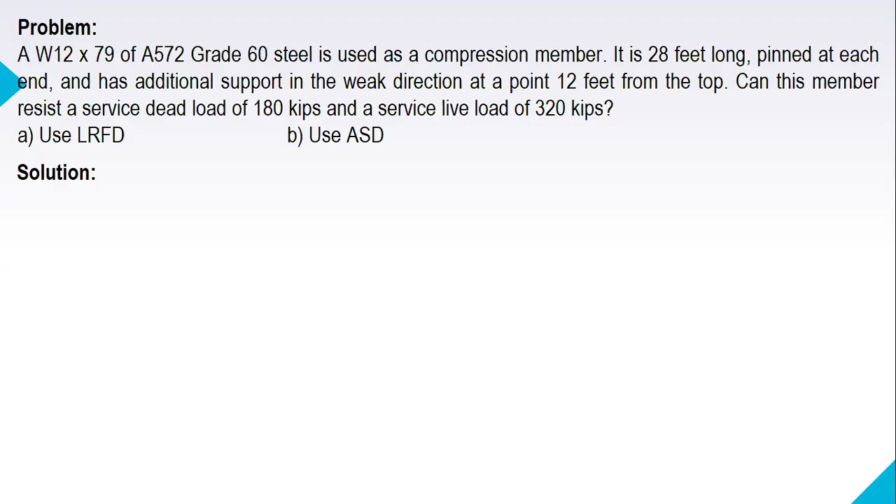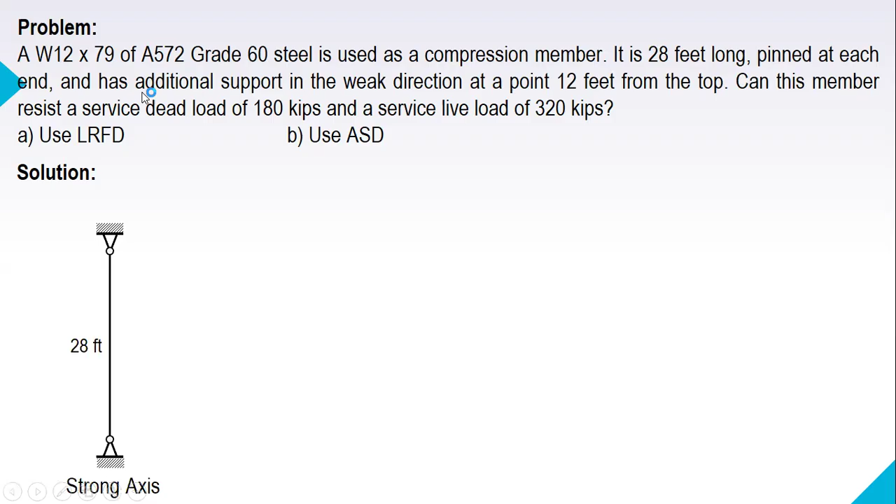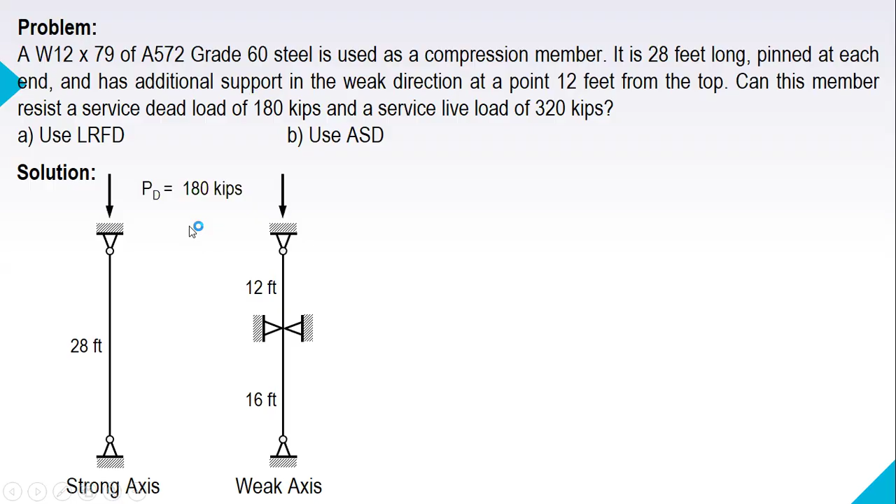So this is our compression member pinned at each end, and this will be our strong axis. For the weaker axis, there is an additional support located 12 feet from the top. So this is the weak axis, with additional support there, 12 feet from the top. So 12 feet and then 16 feet. For the loads, we have service dead load of 180 kips and a service live load of 320 kips.

So first, let us identify the properties of W12x79. The properties that we need are the gross area as well as the radius of gyration for X and Y. From the AISC manual, for W12x79, the gross area is 23.2 square inches. And the radius of gyration is 5.34 for X, and for Y, we have 3.05.

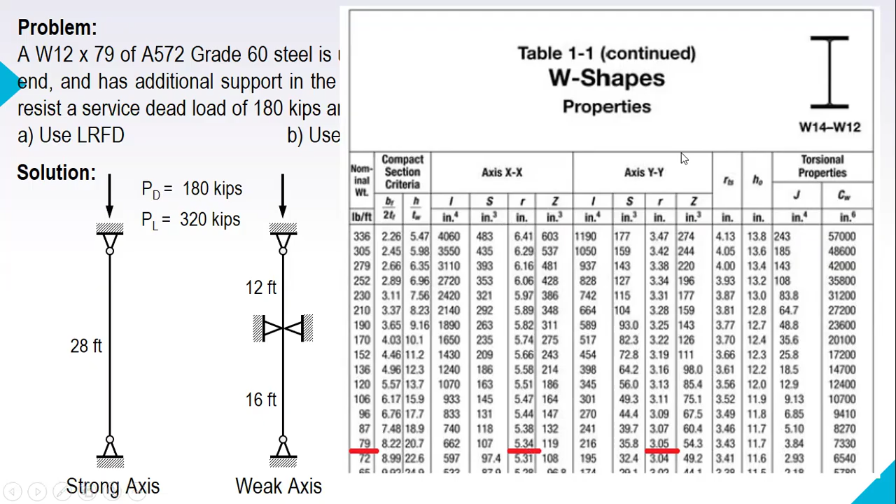And for A572 Grade 60 steel, we need the yield stress as well as the modulus of elasticity for steel. So it's 60 ksi and 29,000 ksi. Next step is the slenderness ratio. From the problem, the member is pinned at both ends, so K is equal to 1.0.

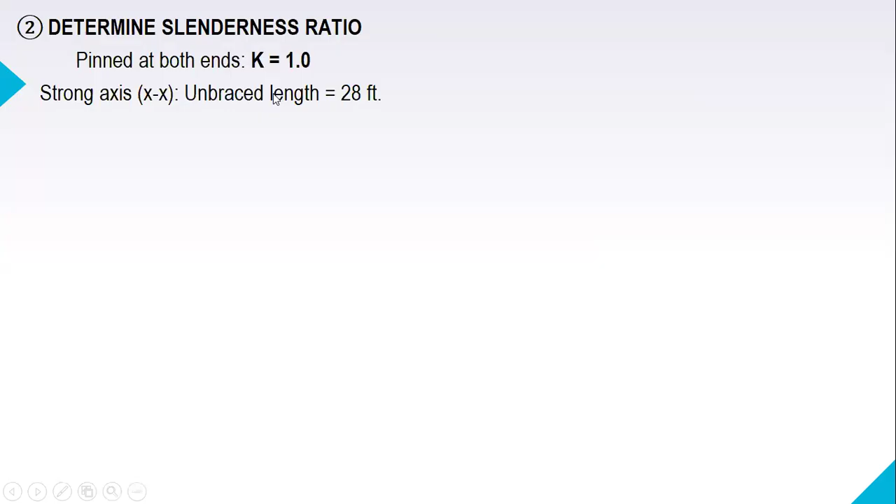And for the strong axis, the unbraced length is 28 feet. So we have the slenderness ratio KL over r: K is 1.0, length 28 feet, converted to inches, so times 12, divided by rx, which is 5.34. So this is for the x-axis.

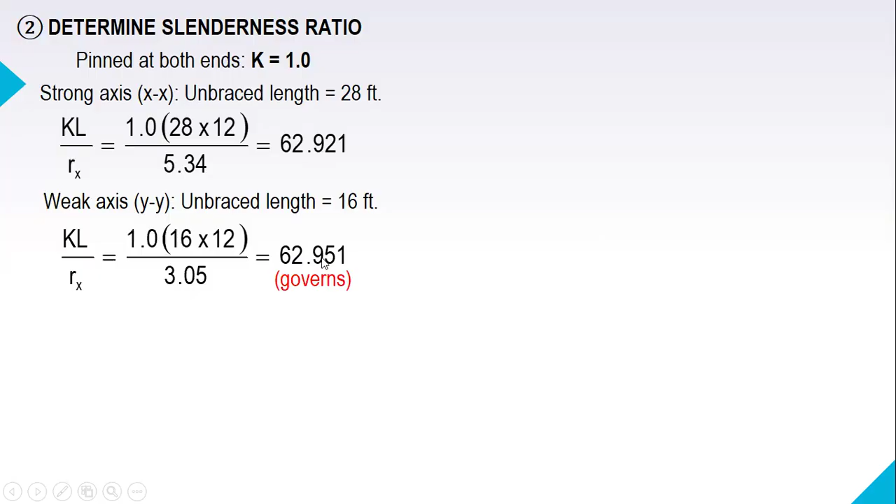For Y, to use in the formula, we need the bigger value of the slenderness ratio. So between 12 and 16, we directly use 16. So KL over r is 16 feet times 12 over r, 62.951. The bigger of the two slenderness ratios will govern. So this one will govern, and this value will be used in computing the elastic buckling stress.

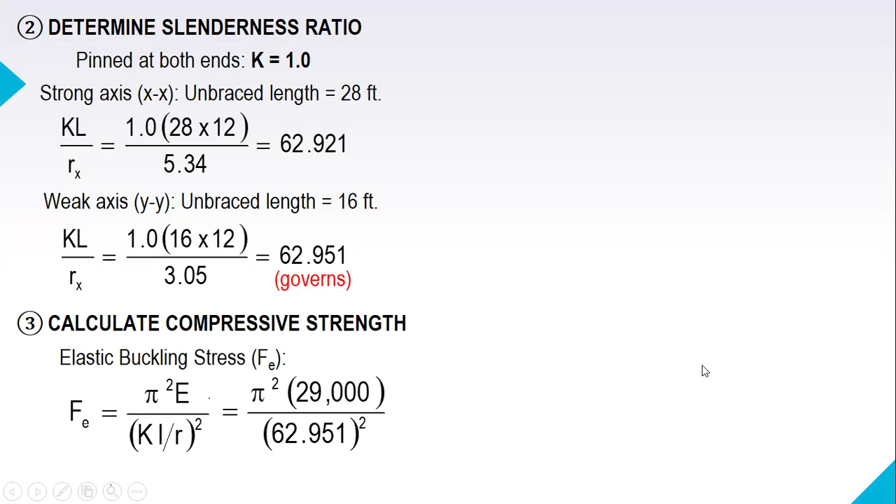So let's calculate the compressive strength. First we have the elastic buckling stress Fe, with the formula pi squared E over (KL over r) squared. Substituting, we have 72.226 ksi.

Next, the critical buckling stress, Fcr. First we need to compare the slenderness ratio KL/r with the limit 4.71 square root of E over Fy to determine which formula of Fcr we are going to use. The limit 4.71 times square root of E over Fy is 103.549, and our slenderness ratio is less than the limit.

So since KL over r is less than 4.71 square root of E over Fy, the formula for Fcr is 0.658 raised to Fy over Fe, times Fy. Substituting values, we have the critical buckling stress equal to 42.379, and from here we can compute the nominal strength.

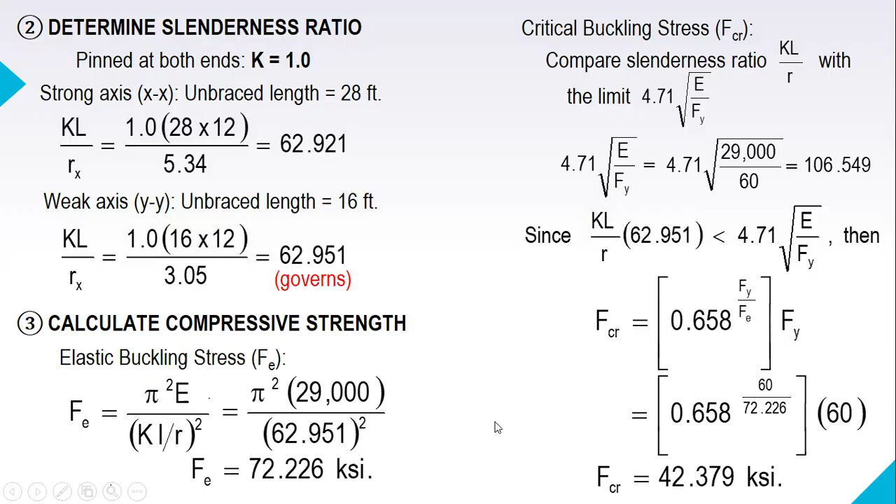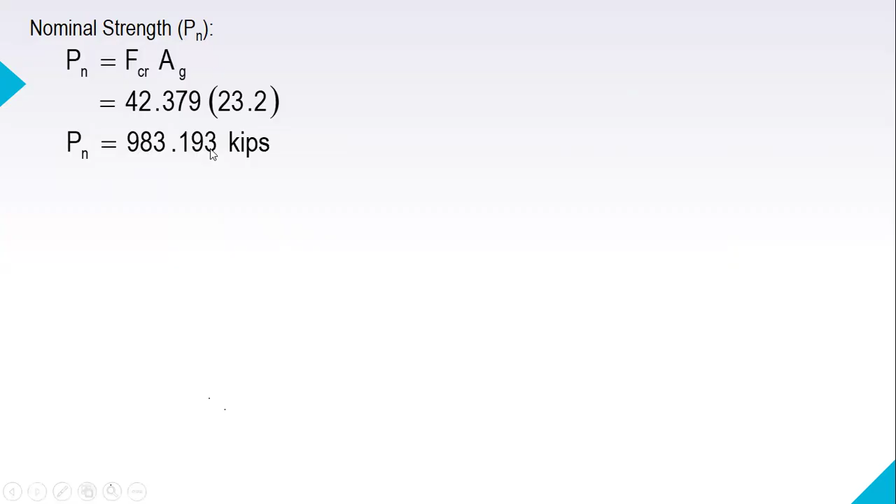Solving for Pn, the nominal strength, the formula is Fcr times gross area: 42.379 times 23.2. So our nominal strength is 983.193 kips. Now using LRFD, let's compare.

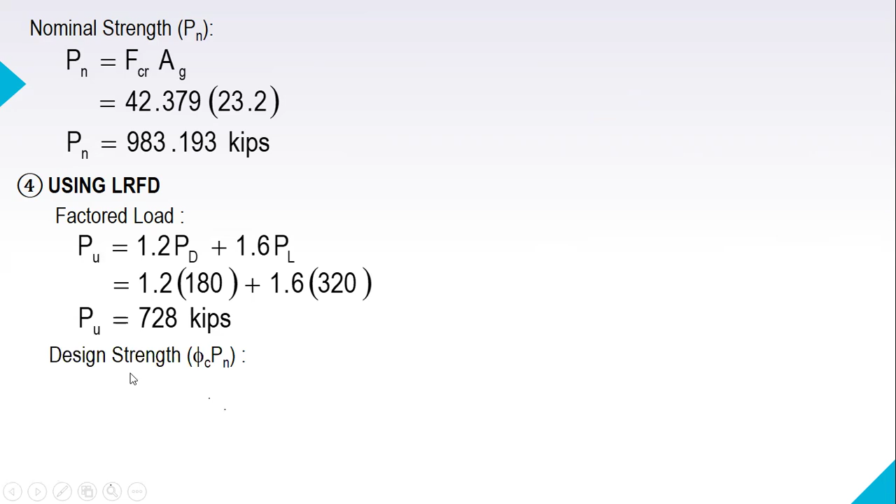The factored load Pu equals 1.2 times service dead load plus 1.6 times service live load, with 180 and 320. So the factored load is 728. For the member to resist, the member strength should be greater than 728. The design strength is the reduction factor times the nominal strength.

Our reduction factor is 0.9 times Pn. This is our design strength. And since the design strength is greater than the factored load, the member can resist the loads.

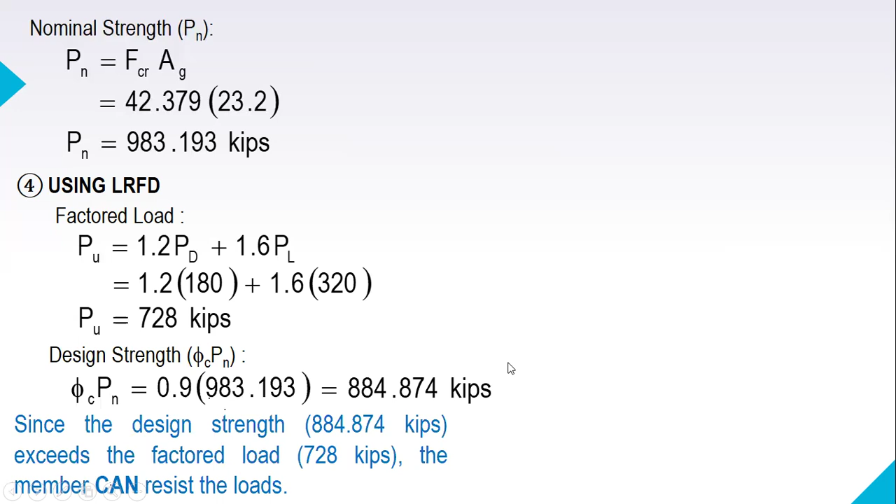Now, if you use ASD, the loads will be unfactored. So the service load, PD plus PL, is 500. Our allowable strength is nominal strength over the factor of safety, and the factor of safety is 1.67. So Pn over the factor of safety gives an allowable strength of 588 against the load of 500.

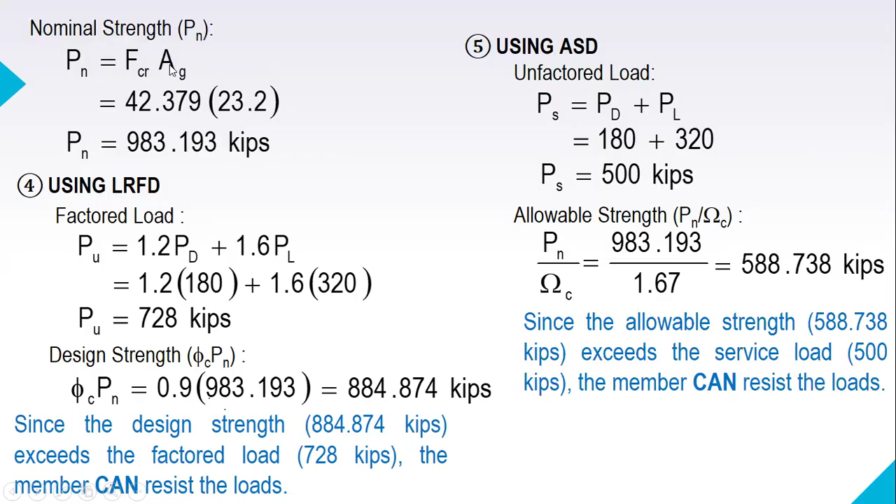So the member can resist the load. Since the allowable strength exceeds the service load of 500 kips, the member can resist the loads. Going back to the problem, the question is, can this member resist the loads? The answer is yes.